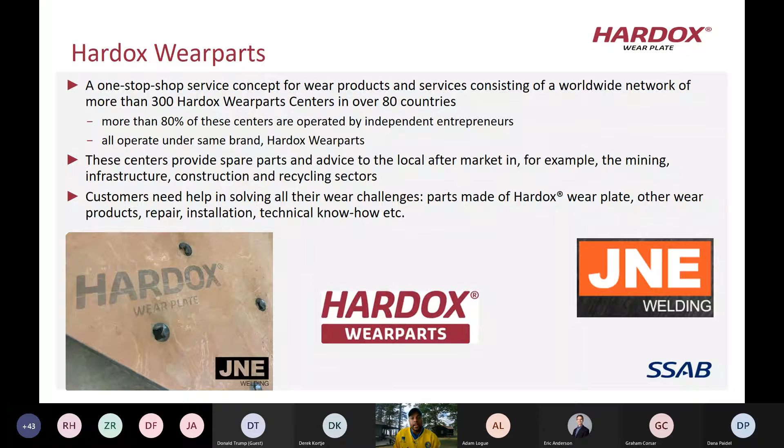That's the key for us to be able to reach out to the industry, and that's kind of the link here between SSAB, Hardox, and JNE. Just so we make that clear. We can move to the next slide. I think one of the biggest topics for us today and for JNE is, of course, to try to clarify the difference between our Hardox and the regular AR in the industry.

So with Hardox versus just standard AR, most AR plate comes in grades like AR 200, AR 400, AR 450, and AR 500. Some people even make what they call AR 450F or 500F, which means it's more formable.

Generally, people use this more when they're actually forming the product instead of just using it in flat plate forming. But with Hardox, we guarantee better bending properties. Our bend radiuses are much tighter than you find with standard AR, and we actually have a guarantee for the bend radius with Hardox.

Also, if you look at the hardness and the typical yield strength, generally those are going to be about the same, because hardness and tensile strength are directly correlated. So if you have a plate that's 450 Brinell, the tensile strength and yield strength will be about the same regardless of who it's made by.

One of the other good things about Hardox is our typical impact Charpy toughness values are generally much higher than what you find with standard AR plate. And our CEV values, carbon equivalent values, give you a good indication of weldability. It's generally much lower than what you find with other generic AR plates. The CEV is basically a calculation based on the chemical elements in that steel, so the lower the CEV, the easier it usually is to weld.

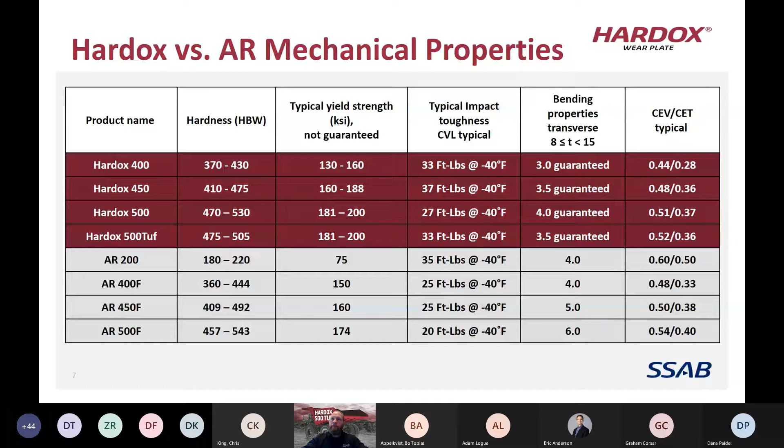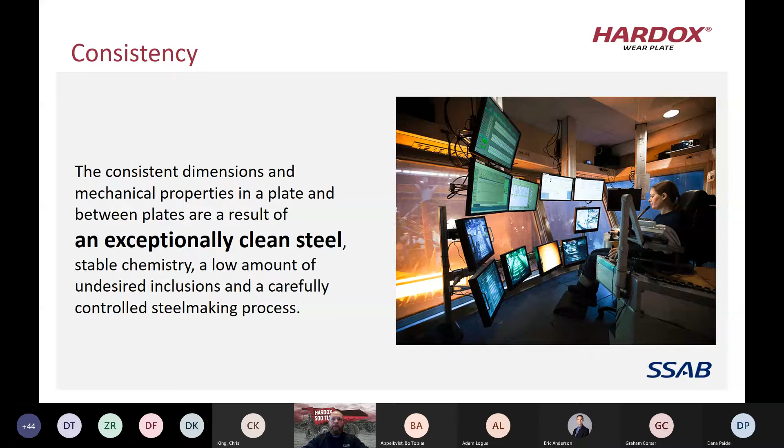So really one of the big benefits with Hardox is consistency. We work a lot to make a very clean steel and make sure it is very consistent. What I mean by consistency is we want to see consistent properties across the plate surface and through the steel. This chart shows a typical AR 450 with the gray line, 20 millimeters thick, and the blue line is a Hardox 450, also 20 millimeters thick.

With Hardox, you can see how the line stays very close to that 450 Brinell, where the competitive AR goes anywhere from 420, 425 Brinell all the way up to around 460 Brinell. So there can be a big difference throughout that plate, which can cause uneven wear, especially in high wear applications. With Hardox, we actually guarantee that the hardness on the plate will stay within 10 Brinell points anywhere across the surface.

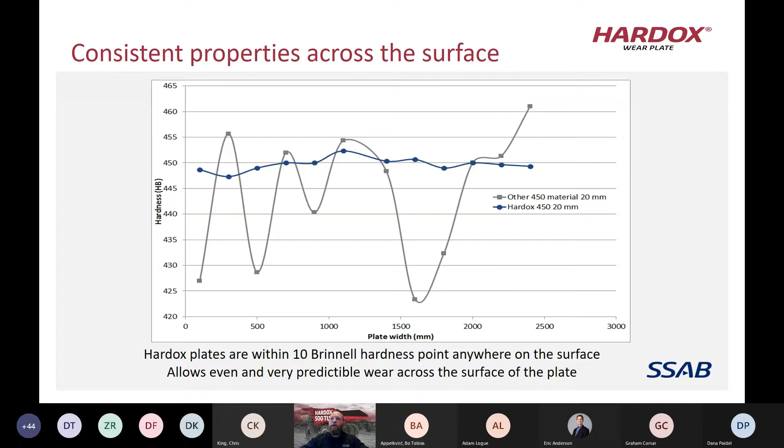Now, when we talk about through-hardness on Hardox, we actually guarantee that the hardness at the center of the plate will be at least 90% of the surface hardness. This chart shows Hardox 550 at 40 millimeters. If you go across the chart left to right at the 20 millimeter mark, the center of the plate, we see our lowest measurement, but it's still not below 525, which is the minimum hardness for Hardox 550.

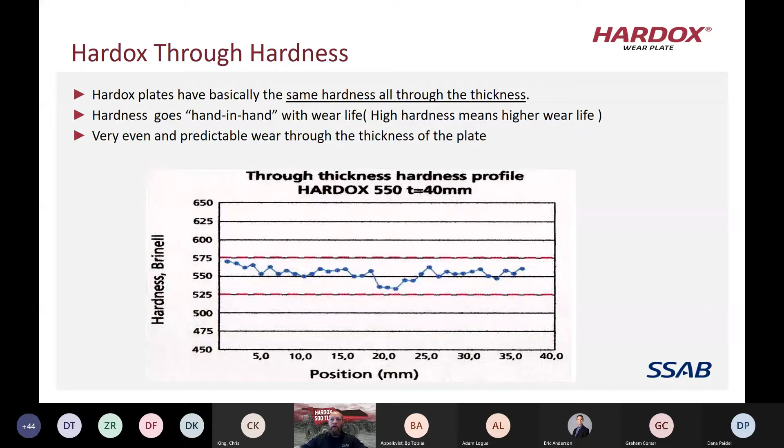This is really important whenever you have large or thicker plates that are wearing. As you get closer to the center of that plate, with some competitors you could see a drop of 100 Brinell points, and then you're going to wear much quicker at the center than at the surface. This chart shows Hardox 450 versus a typical AR. On the left, the gray line at the top is the Hardox 450, showing hardness through the thickness of the plate, and the red line shows a competitive plate.

This becomes even greater when you go to something like a 50 millimeter, or 2-inch, plate. Looking at the graph on the right, the relative lifetime improvement can be a little over 20% just switching to Hardox 450. So a lot of people look at what's the cheapest price, but with Hardox we're looking to create value, not just sell you a cheap plate. We're trying to make sure the plates we sell give you good performance, longer lifetimes, and much more consistent wear.

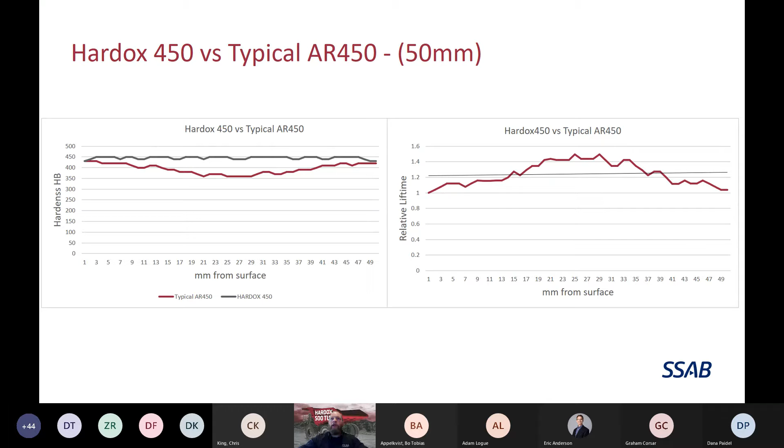A lot of mines typically want to have a regular scheduled maintenance interval, and they don't want to have unpredictable downtimes.

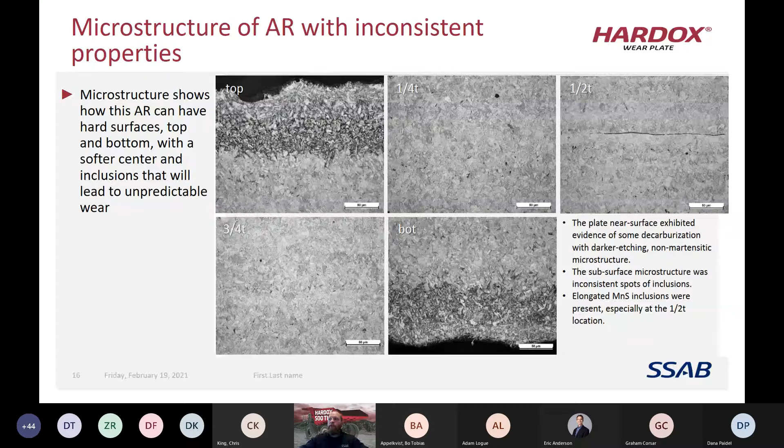The next big thing for Hardox is very good toughness. Hardox was actually designed in Sweden, so it's meant to be used in very cold climates. Most of our Charpy toughness values are taken at minus 40 degrees Celsius. We have a lot of customers, even up in northern Canada, in mining that regularly sees minus 50 degrees. So it's not uncommon to see Hardox used in very cold climates, and it exhibits very good toughness values.

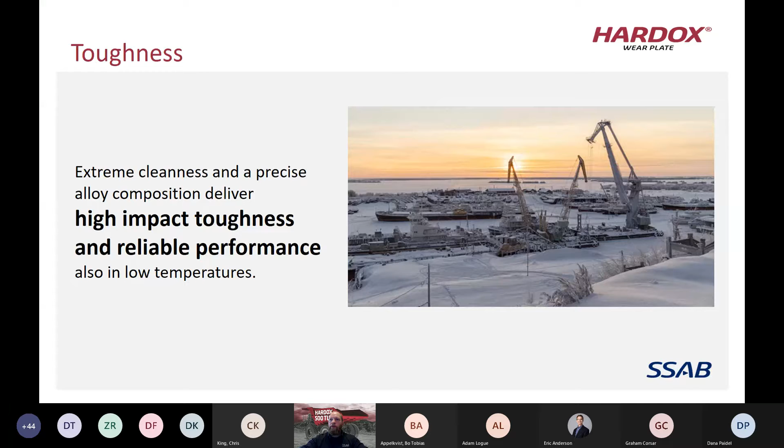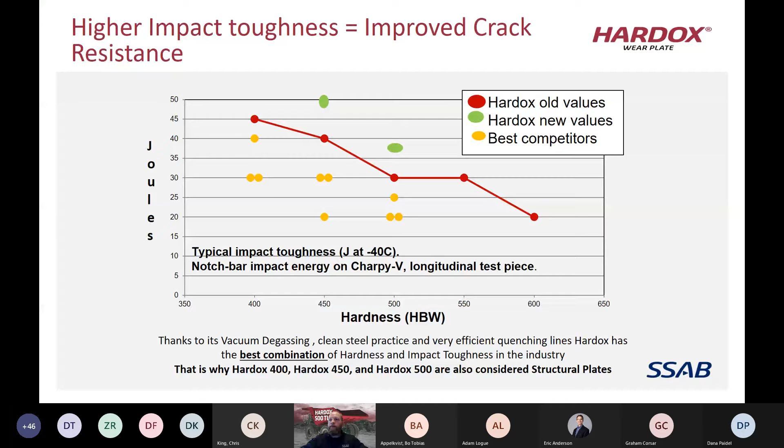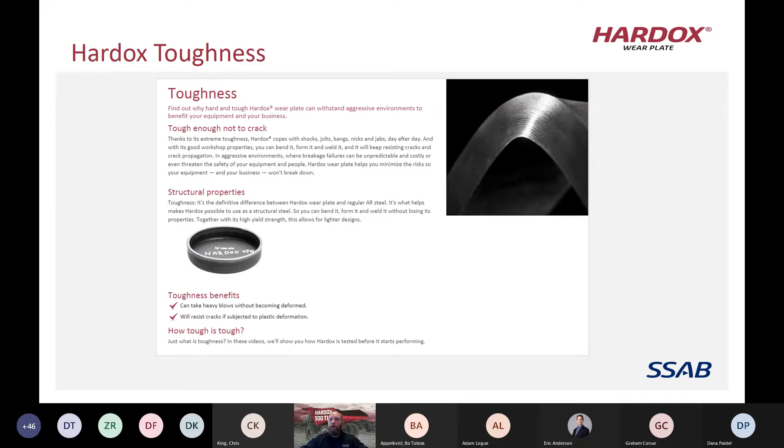We actually have a drop test rig that has been built and we use in Oxelosund, Sweden. We have plate samples that we put into the rig. You can load a certain amount of weight onto it, and then drop it from a set height. So we can measure the dent depth that we see, and see if the plate would crack depending on the amount of impact it would sustain.

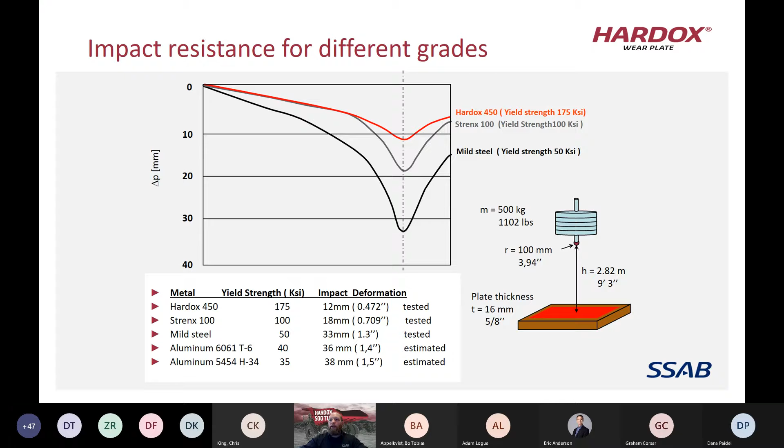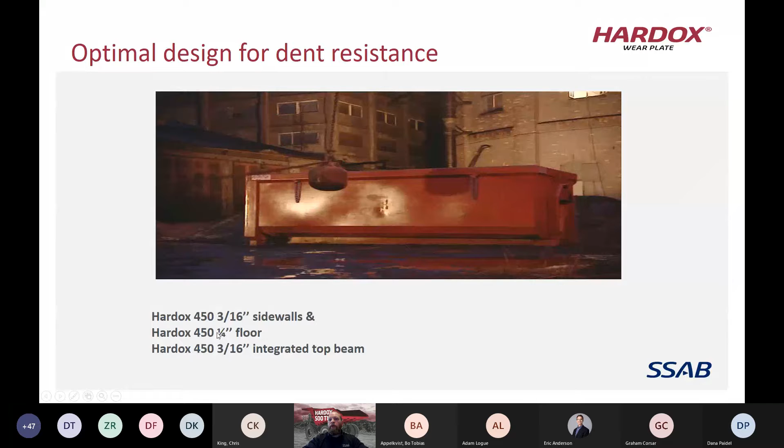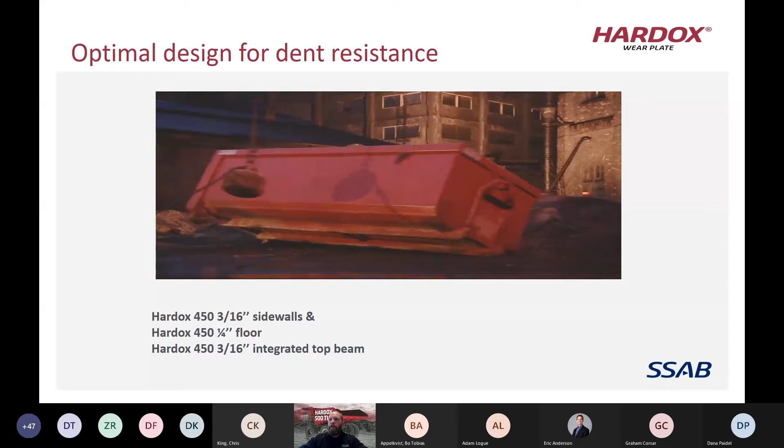One thing that's kind of neat, I know a lot of people like to see videos - this video is of a container. It's Hardox 450, 3/16 inch sidewalls with a 1/4 inch floor. This is what we call the wrecking ball video. You can see when the wrecking ball hits the side, it can take a lot of abuse and a lot of deformation.

And the top rail, or the top section of the container, is also made out of Hardox 450.

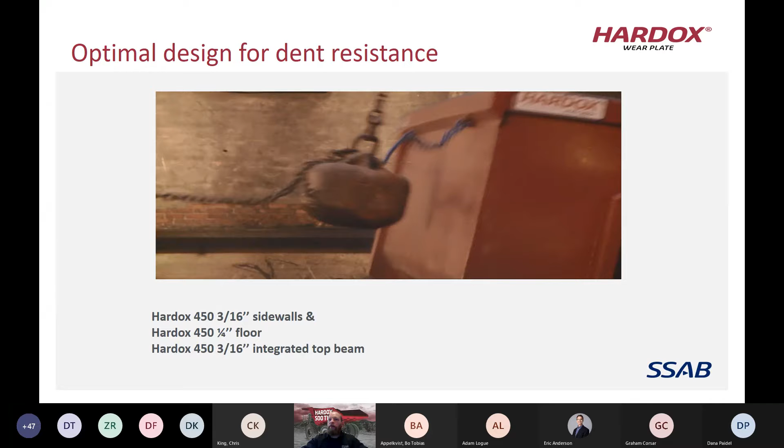So like Tobias was saying earlier, we are a steel mill. We need people like JNE, we partner with companies like JNE. They are integral to our process as we make the full steel plates, and we need people like JNE who can actually turn them into usable products for the end users.

With us being the steel mill, we work on, especially with Hardox brands and Strenx brands now, making steel that is much cleaner than what was produced 5 to 10 years ago. And we pride ourselves on making some of the cleanest steel in the industry. There's a lot that goes into the processing of the steel, because we work very hard to make steel that is very tough and very consistent.

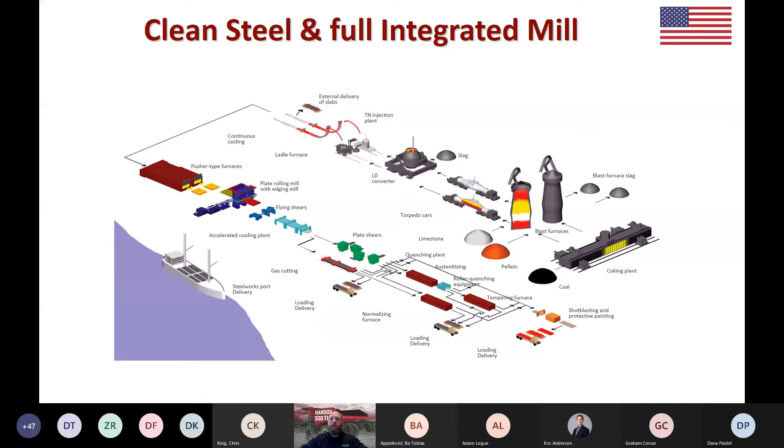And we also want to make sure that the steel is able to be used in the workshop in a good way. One of those ways is through the processing of the steel itself. Instead of adding a lot of alloys to try and meet certain mechanical properties of the steel, we actually do it through the processing of our steel, such as through our quench and temper lines.

One of our process routes is called the vacuum tank degasser. What that does for us is help us really reduce 5 of the big elements that can cause issues to the workability of the steel: oxygen, hydrogen, phosphorus, sulfur, and nitrogen. Now these can all lead to inclusions, cracking, and also reduce the toughness of the steel.

So when we really work on reducing these elements in the steel, then we have much more consistent properties, much better Charpy impact toughness. The bendability becomes much better, the formability, and especially the weldability.

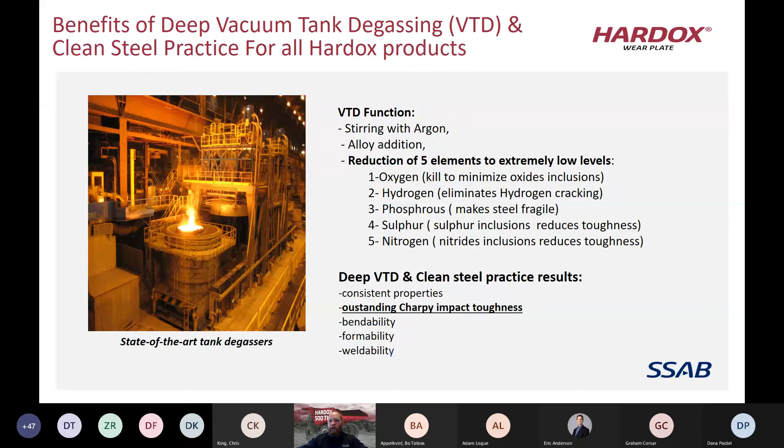So with SSAB, our quench lines are actually designed by SSAB internally. Some portions of the quench lines themselves are built by external customers, vendors, or contractors, but everything is brought into the SSAB site and assembled on site.

So no one has the full plans for the SSAB quench lines. Like I said, we design especially the quench box, we design all the elements and have portions of it built. We assemble it all on site and have the complete plans ourselves. We actually spend a lot of time doing research and development on quenching for SSAB plate.

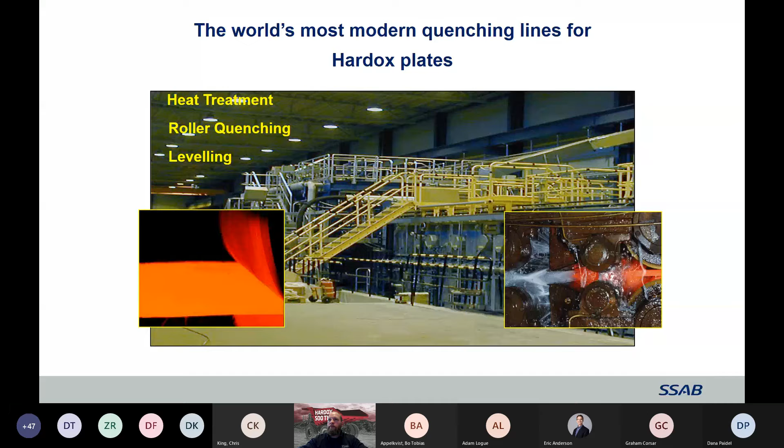Now, our quench is what we call a roller quench. We use around 35,000 gallons of water per minute, and the water is actually monitored for chemistry and temperature. We want to make sure that the water is consistent to completely cool that plate within seconds.

And we can actually quench a plate from 900 degrees C down to less than 50 degrees C in under a minute, and that's even for a 1-inch thick plate.

Now what this does is create a martensite structure throughout the steel. It also has a very consistent grain structure. We have fewer alloys needed to achieve the hardness, and this also helps us have a uniform through hardness. So like we were talking about earlier, the through-thickness hardness of that plate is very consistent, very even.

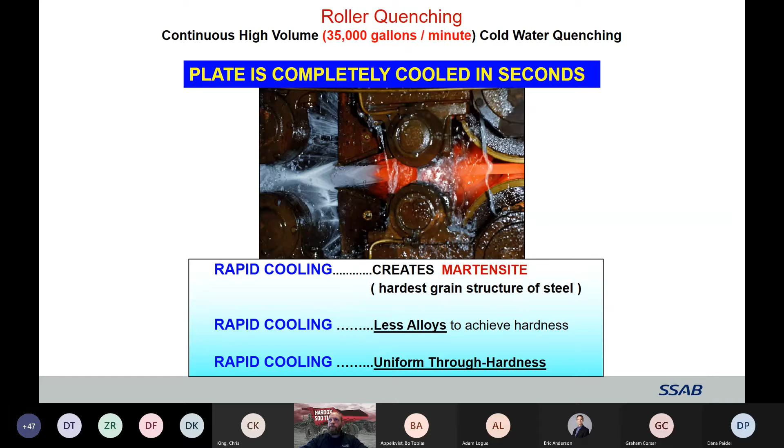Some of the Hardox plate products, we have anything from what we call Hardox HiTuf, which is around 350 Brinell hardness, all the way up to what we call Hardox Extreme, which is like 60 Rockwell C.

And the plate thicknesses, we have anything from, say, 3 millimeter all the way up to a little over 6-inch thick plates, depending on the grade you're looking at. But like a Hardox 450, we can make it all the way from say 3.2 millimeter up through almost, I think, a little over 5-inch, maybe even 6-inch today.

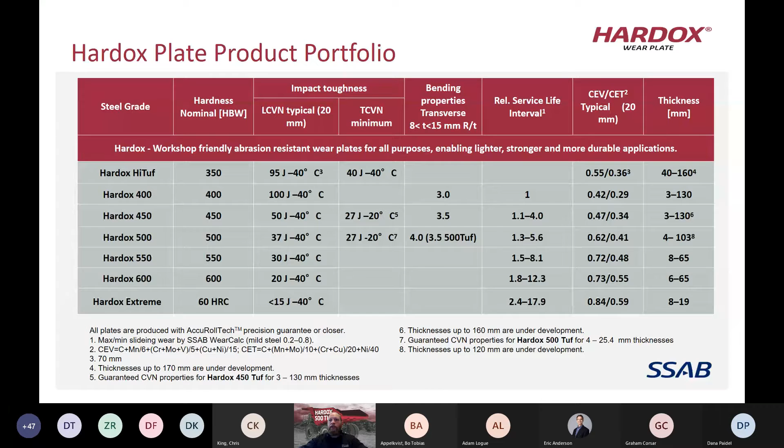We also produce some strip product or coil products. These are much thinner gauges and limited on width, but have very good surface properties, very good flatness and surface finish. We produce anything from like a Hardox 400 all the way up through a Hardox 500 Tuf, with varying thicknesses depending on the grade, but anywhere from like 2 millimeter up to 8 millimeter.

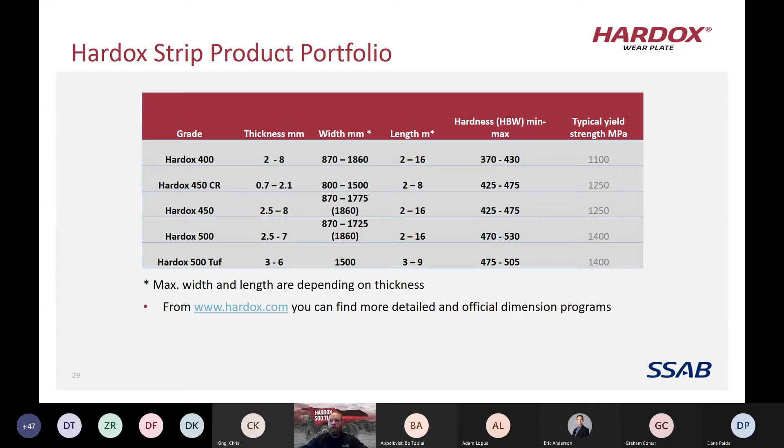We also have what we call Hardox 450 cold rolled, from 0.7 millimeter up to 2.1 millimeter. So we have a wide range of grades and varying thicknesses to cover whatever your needs may possibly be.

So, Hardox and potash mining. A couple of our newer products are Hardox 500 Tuf and Hardox HiAce. The Hardox 500 Tuf is basically a 500 Brinell plate that has...

...a lot of the same mechanical properties as a Hardox 450. So we've worked with a lot of mines before, and a lot of them want to be able to use a 500 Brinell plate in place of their 450 Brinell areas for something that will last longer, but also work as well.

And the Hardox HiAce is basically like a Hardox 450 that's crossed with what we call a Cor-Ten, or a corrosion resistant material. So it has very good corrosion resistant properties, and it's also a 450 Brinell wear plate.

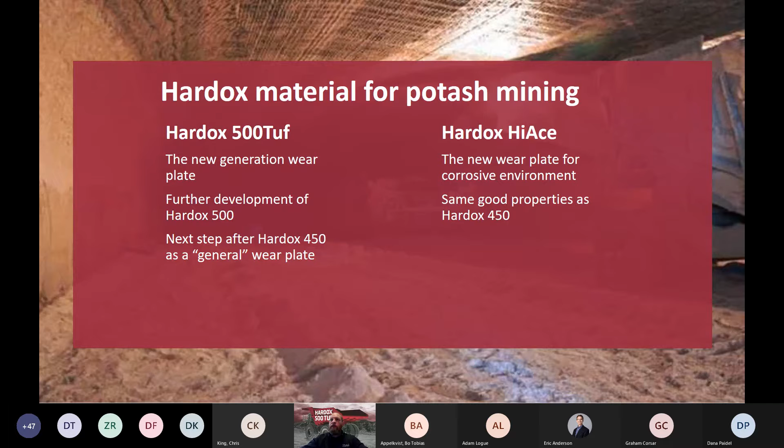So the Hardox 500 Tuf is what we call the new wear steel. A lot of the dump bodies, mining dump bodies, buckets, that sort of thing, are starting to use a Hardox 500 Tuf. And it comes available anywhere from 3 millimeter up to 25.4 millimeter, or 1 inch.

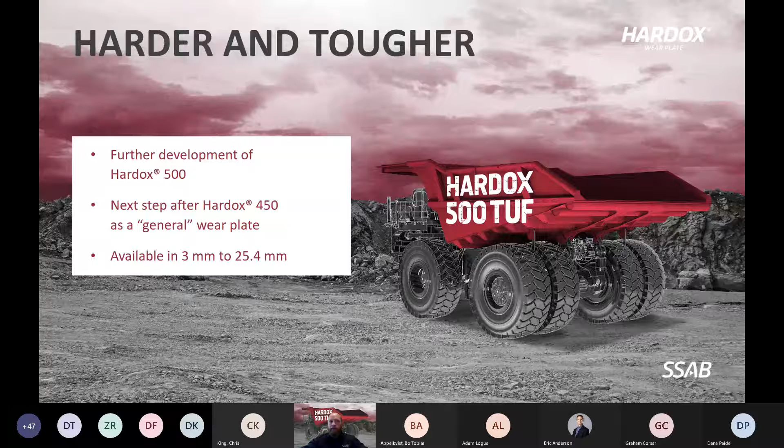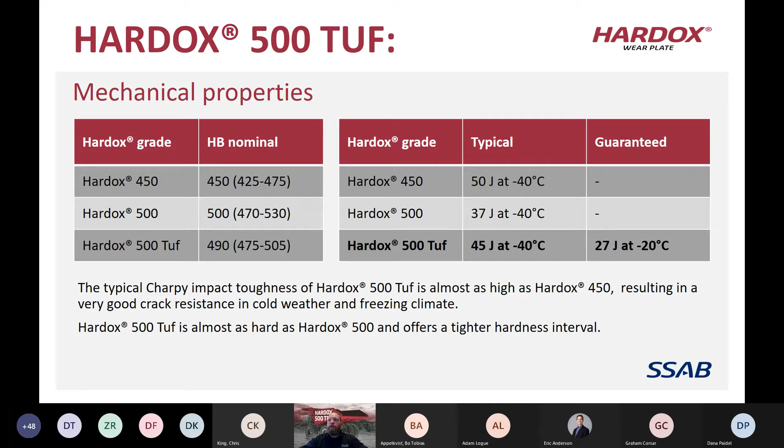With the Hardox 500 Tuf, it's very close in mechanical properties to a Hardox 450, but it's got the 500 Brinell hardness. Its nominal is 490 Brinell, but it has a tighter hardness range than a typical AR 500 plate. The typical impact toughness value for Hardox 500 Tuf is 45 joules at minus 40 C, and we actually have a guarantee on 500 Tuf, which is 27 joules at minus 20 C.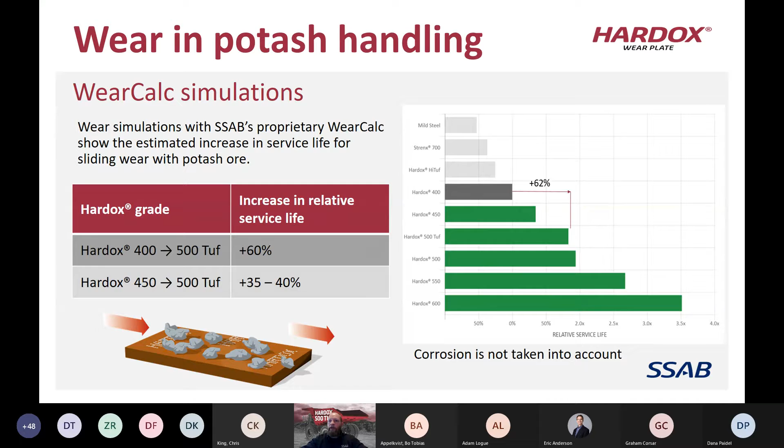And then if you look at dent resistance, so if you have a container or dump body or something that's taking a lot of impact and abuse, we've seen where 1/4 inch Hardox 450 going to Hardox 500 Tuf 3/16 of an inch thick, it's taking the same dent resistance as the 1/4 inch Hardox 450.

So the 1/4 inch Hardox 450 and the 3/16 500 Tuf would have about the same wear life and also the same denting resistance. So we have a lot of dump body manufacturers that are upgrading, going thinner with the Hardox 500 Tuf, and so it makes their dump body or their container lighter so they can carry more load, and they're having the same lifetime out of their product.

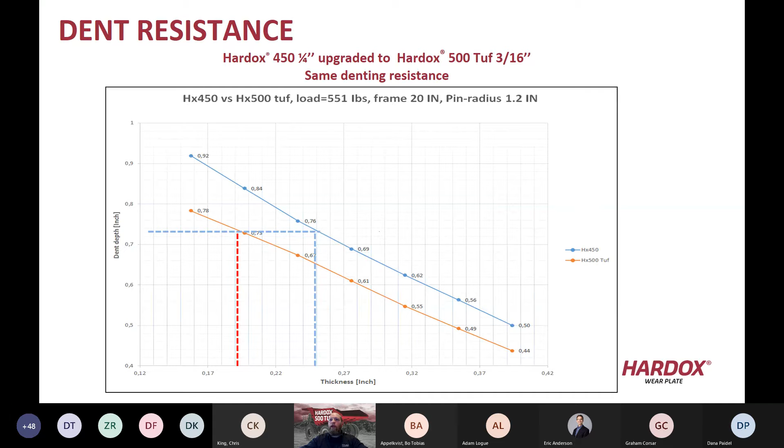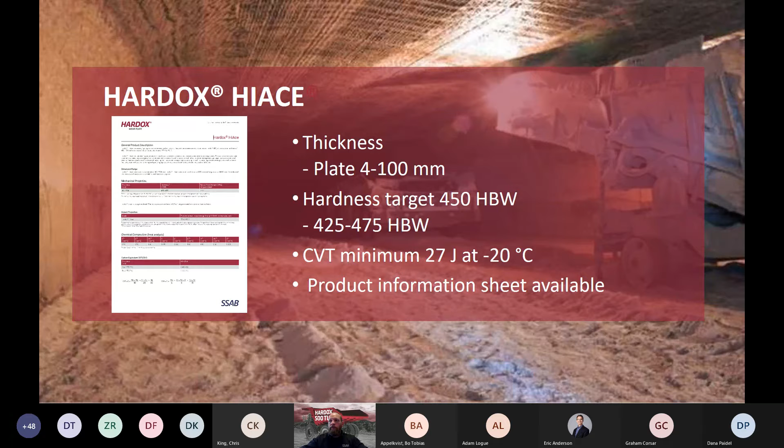Now, like I said, with the HiAce, the Hardox HiAce, it's a 450 Brinell steel, very good Charpy toughness values. Its minimum Charpy is 27 joules at minus 20 C, but it's got that corrosion resistance that really helps.

So with the Hardox HiAce, it's got the same bending properties as Hardox 450. The main thing with Hardox HiAce is there's no preheat for 8mm plates and below, but anything above 8mm, it needs to be welded with a stainless consumable or at least preheated up to 150 degrees C for welding.

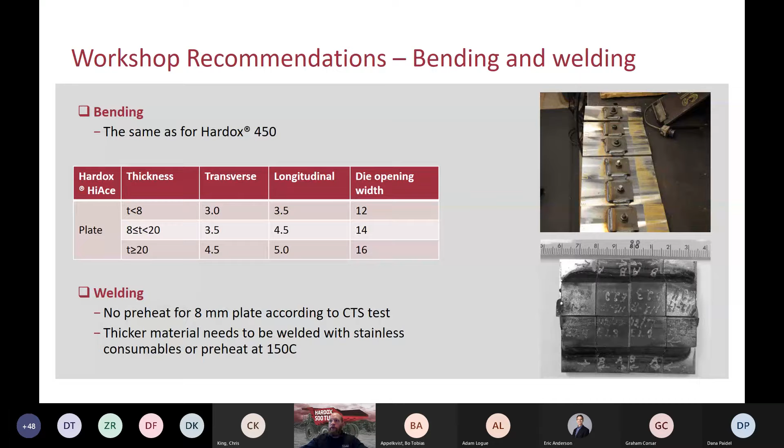The Hardox HiAce has more alloying elements to it, to help resist the corrosion, which is why it calls for more preheat than a standard AR 450 or Hardox 450 plate.

Now in Sweden, at our R&D facility, we have what we call a drum wear test. Basically it's a drum where we load, I want to say it's like 27 or 30 samples into it. Each sample is milled to size and weighed prior to going into the drum. Each sample is mounted in the drum, and then they can load a different type of media.

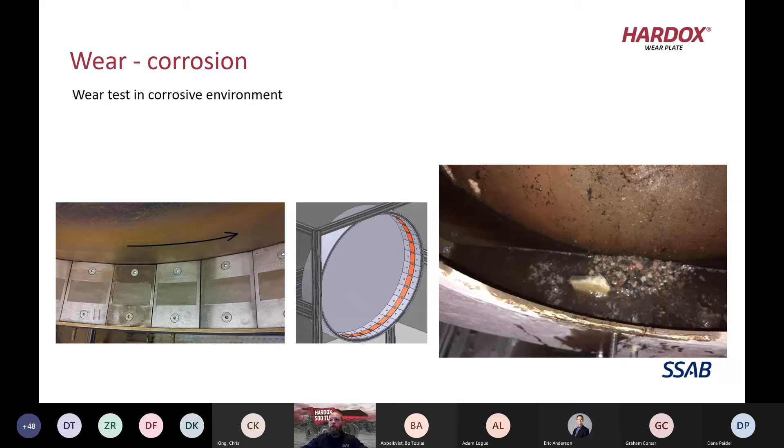And this one has some water and some chlorides added to it. That way you get more of a corrosive wear inside the drum, and so we can see what the actual wear rates are coming out of the drum. So after we tumble this drum for several days, we take those samples out, weigh each sample, so we know what the wear or the mass loss is for each one, and correlate it to a wear life increase for each plate.

With Hardox HiAce, we've actually seen about double the life over a Hardox 400 for an environment with around 300 ppm of chlorides, so about a pH of 6. We've also seen better wear life out of the Hardox HiAce compared to some stainless steels, where you're seeing corrosion plus abrasive wear. So this isn't strictly a corrosive environment, you're actually seeing the corrosion plus the wear.

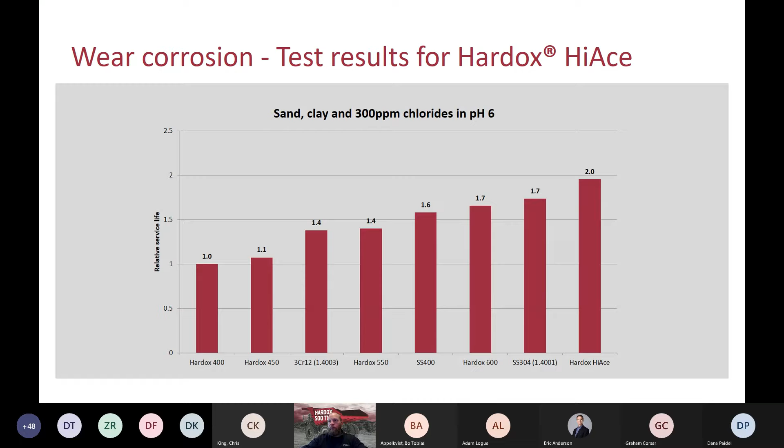Like I was saying earlier, in a lot of our dump bodies, container manufacturers are included in our Hardox in My Body program. Basically this allows them to put the Hardox in My Body stickers on their products, showing their customers that the products they build have Hardox plate in them, which is really good for them as a selling point.

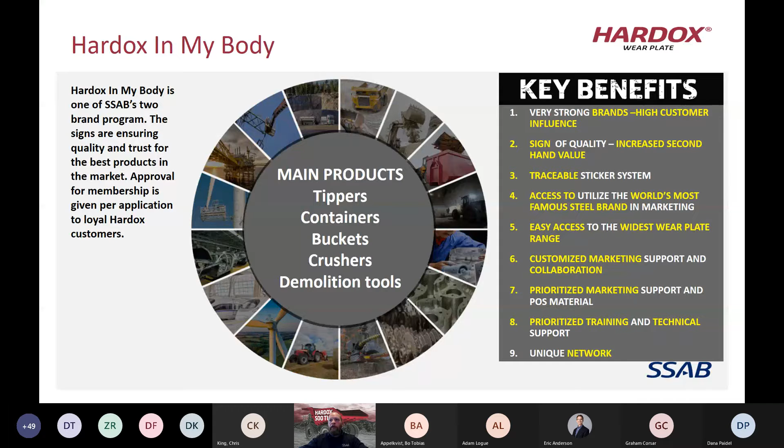I've even had a lot of them say that their customers get better resale value out of their products just because it's got the Hardox in My Body sticker on it. This is kind of the same program as the Hardox Wear Parts program that JNE is part of, just strictly more for tipper container manufacturers and bucket manufacturers.

So some of the mobile equipment applications - if we look at hydraulic mining shovels, we have a lot of different products that can be used for these types of buckets, basically anything from Hardox HiTuf, Strenx 100, which is similar to a QT 100. We also have Hardox 500 and 550 that we can use for wear packages on these buckets as well, improving the service life by up to 36%.

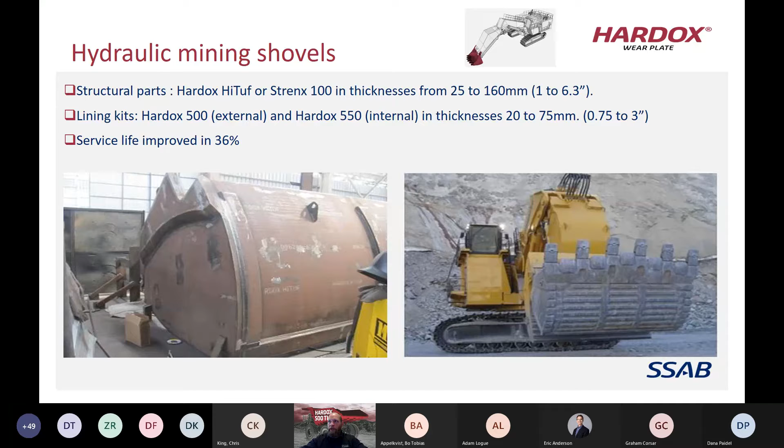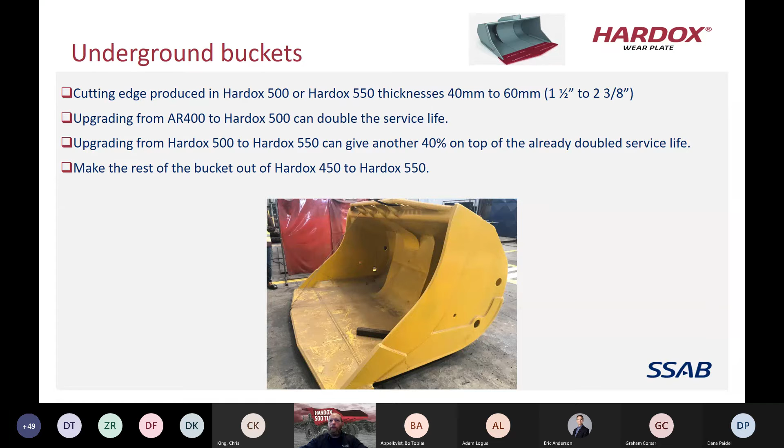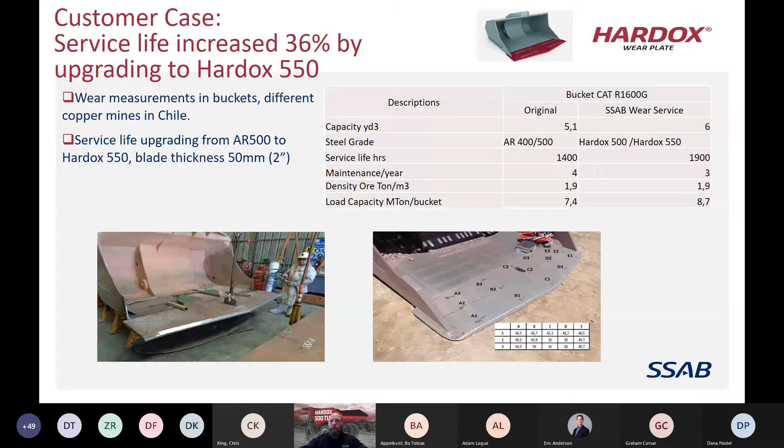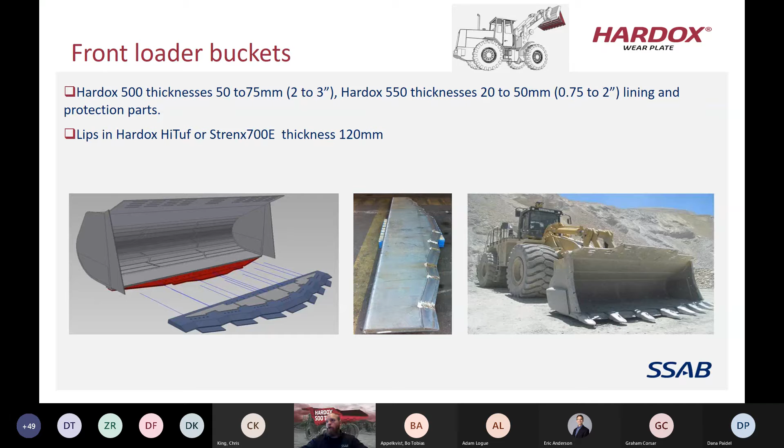Another one is front loader buckets. This one has the front lip or cutting edge area made of Hardox HiTuf and/or Strenx 700. This thickness was 120 millimeter, but we make the HiTuf and Strenx 700 up through 6 inches thick.

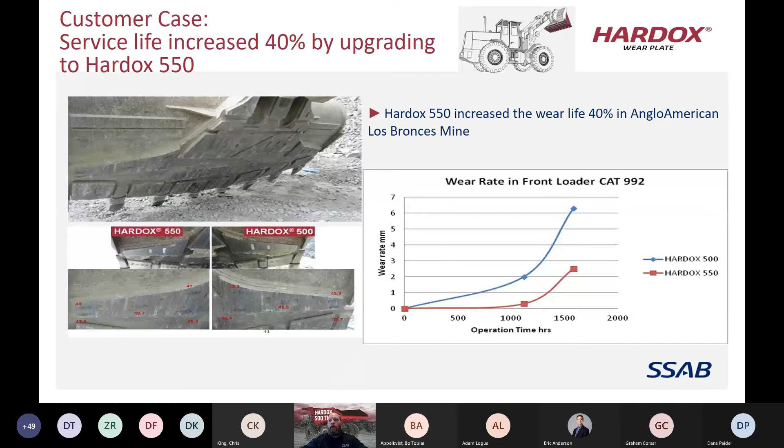This is another case, service life increased by 40% by upgrading to Hardox 550, basically going from a Hardox 500 to a Hardox 550. They actually used Hardox 500 on one side of the bucket and Hardox 550 on the other side, so they could see the wear life in the mine at the same time and do a straight comparison of the wear life on both.

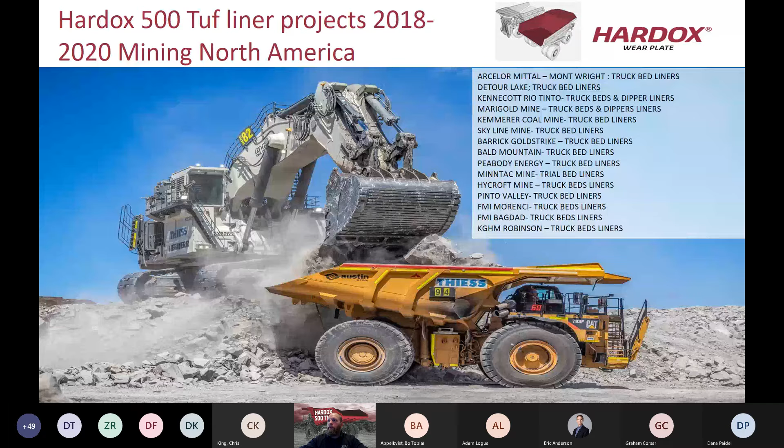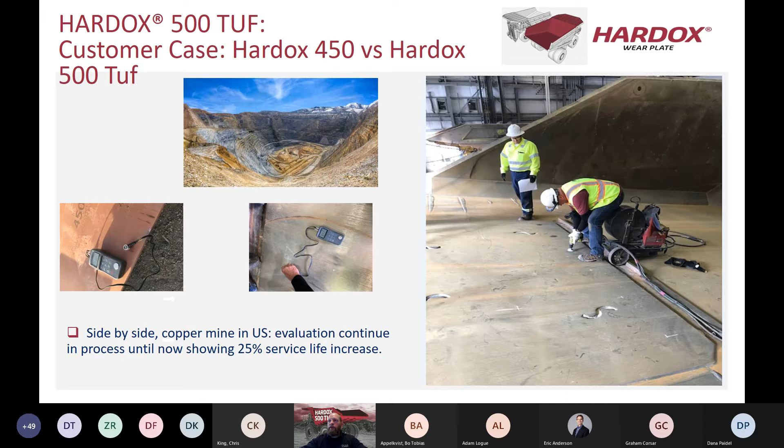This is another case of Hardox 450 versus 500 Tuf. They saw an increase of 25% in service life, just going from the Hardox 450 to 500 Tuf at the same thickness, just an increase in the hardness, and they saw an increase in service life.

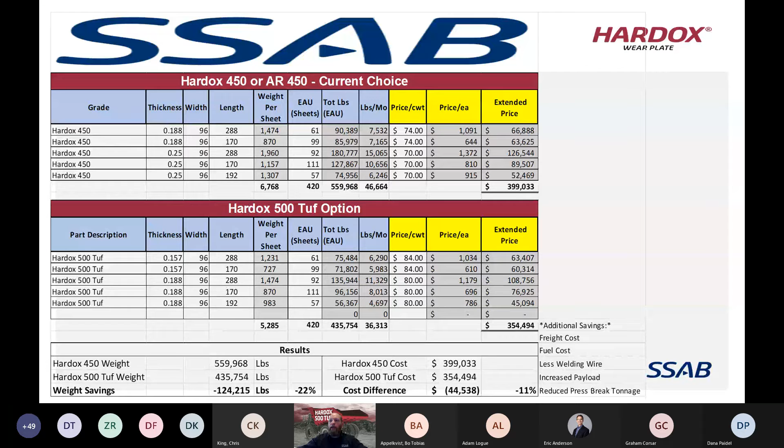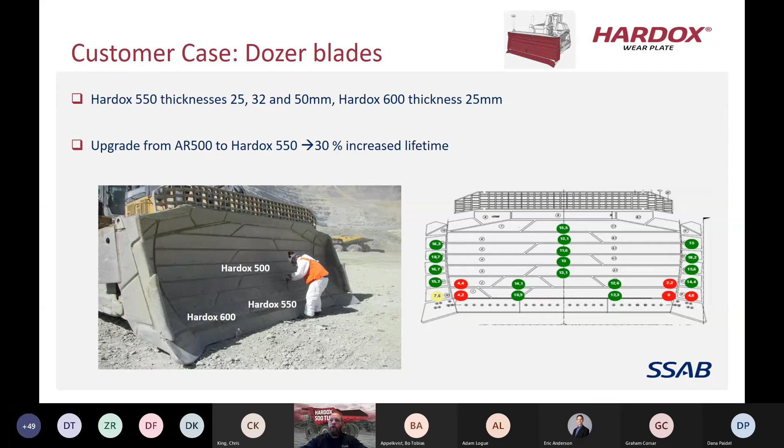Now this is another customer case with a dozer blade. Basically they did a lot of upgrading in the worst wear areas. In the lower sections, use more of the harder Hardox, like Hardox 600 and Hardox 550, and then work your way up through say a Hardox 500 and even up to Hardox 450. This can increase the service life by around 30%.

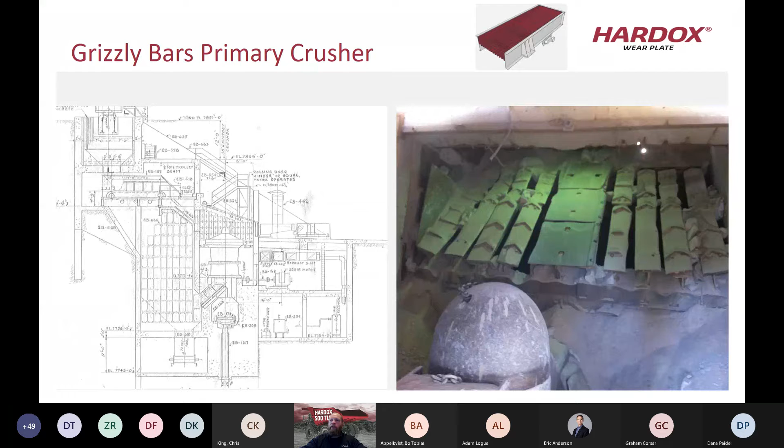Some processing equipment, things such as grizzly bars - the picture on the right, I guess they were just trying to make it last, but that's not a very good application there. With Hardox grizzly bars, we've had customers use anything from a Hardox 450 half-inch, a Hardox 450 2-inch, and it can definitely go up to say Hardox 500, especially the new Hardox 500 Tuf for some of these applications.

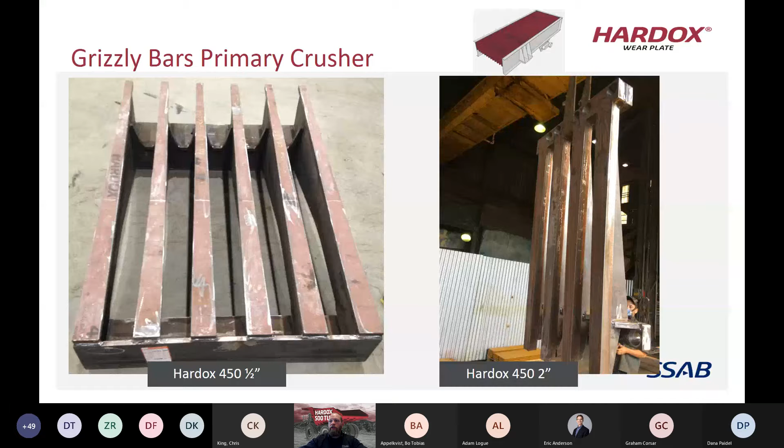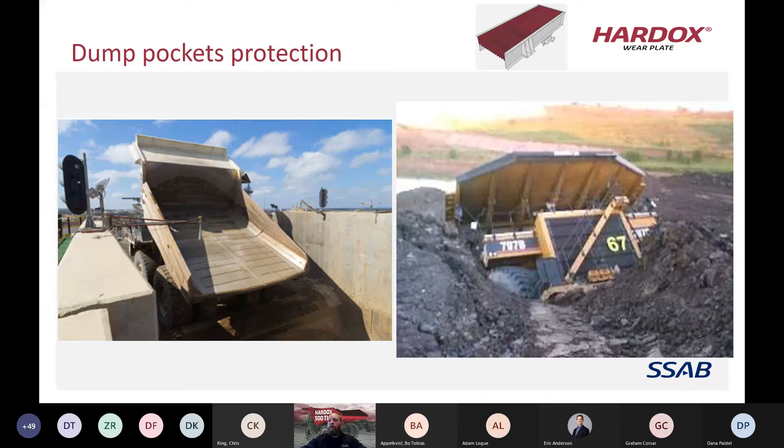And dump pocket protection. So you definitely don't want to be the guy in the cat on the right side, because that is not a fun day.

Let's see, loading system and silos. This one was lined with Hardox 600, 5/8-inch thick, and mounted with studs welded to the back side of the plate, and then mounted through the side walls of the silo.

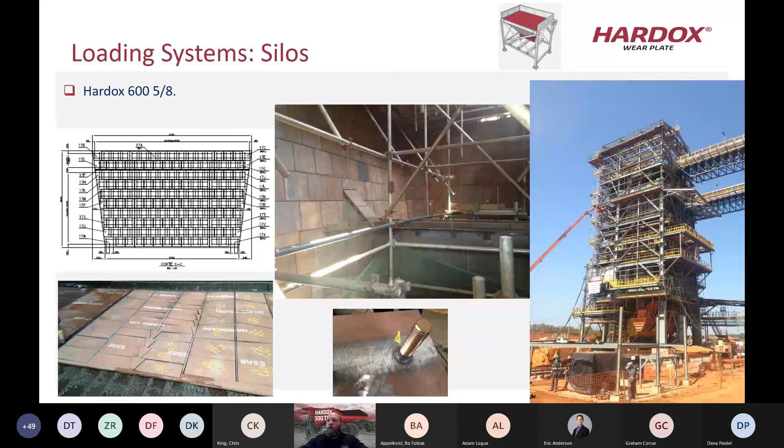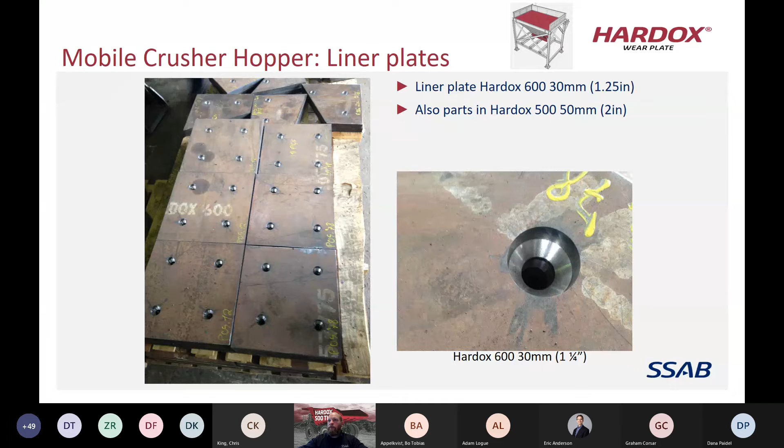The mobile crusher hopper liner plates - these plates were actually installed with bolts that are drilled and chamfered. Companies like JNE, that's what they're good at, taking the Hardox product and producing plates, and being able to produce these liner plates in a usable fashion so you can actually install them. They have a lot of different ways to come up with arrangements to mount the plates to match what your needs are.

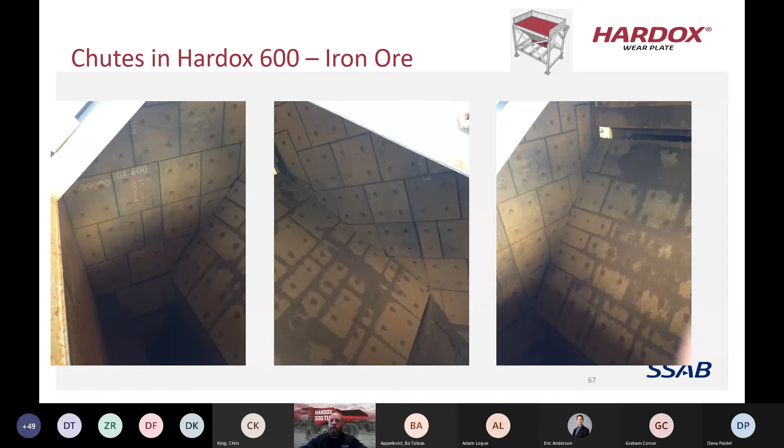So this is a chute for iron ore, lined with Hardox 600. And then apron feeder - usually the pans are manganese casting. We've actually had some customers start making them out of, say, Hardox 450 or Hardox 500 Tough. This can help by making them more cost effective and a little easier to produce and change out.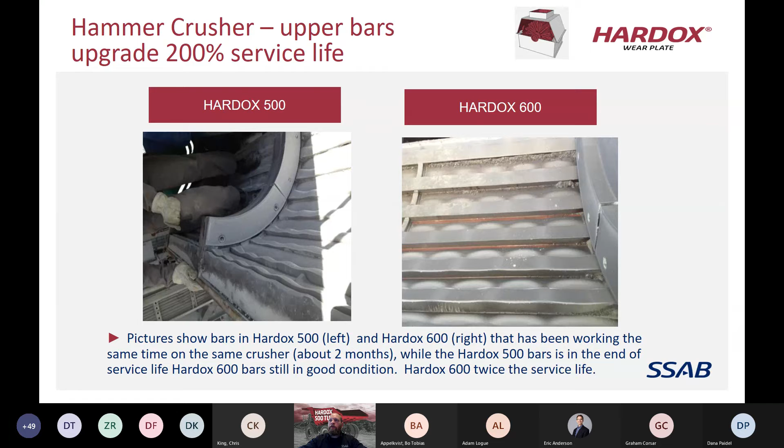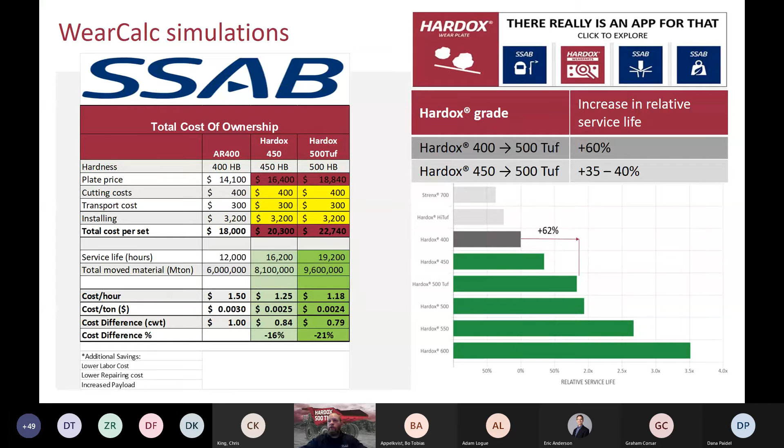Earlier we looked at the relative wear life, which came from our WearCalc simulation. So basically, going from an AR 400 or Hardox 400 up to the Hardox 500 Tuf, we can see a cost difference where you can have a savings of around 16% going from an AR 400 to Hardox 450. Or if you go up to a Hardox 500 Tuf, you can see a cost difference of around 21%. So the cost per hour and cost per ton are reduced by the service life increase of the steel.

So the big conclusions for Hardox: basically we have flatness guarantees, bending guarantees, thickness guarantees, and our flatness and thickness guarantees are better than ASTM standards, better than EN standards. We also have a carbon equivalent guarantee, so that guarantees you're going to get good welding results every time. Our plates are very consistent from one day to the next, one month to the next, and year over year.

We also have local warehouse stocks - we have a lot of locations that stock plate, and companies like JNE have a lot of our material in their stock, so they can easily pull stuff out and produce parts for you very quickly. We have the most advanced quench and temper line in the world, and 2-tier technical support. I'm one of the frontline technical support managers, but we also have an R&D facility in Montpelier, Iowa, and a Knowledge Service Center in Sweden that can back us up with much more technical knowledge. We also have our marketing and brand programs like Hardox In My Body, and our local wear parts centers. JNE is one of our wear parts centers, and that's why we partner with people like them.